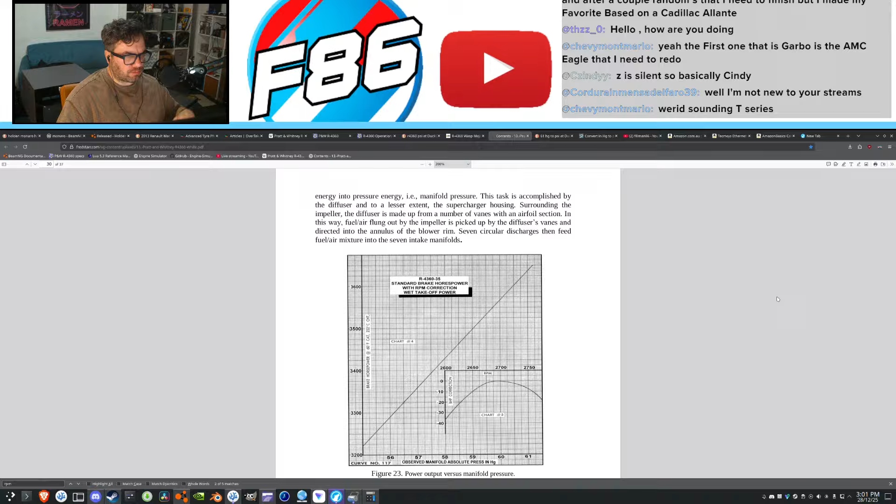Let's go without appropriate speed without overboosting. Harming without significant distortion. It's only one more. Without compromise bearing performance. Okay. Where's 302? Let's go back to 302. Oh, that is such a cool picture, because it makes it look like it's a small thing, but in reality, this thing is goddamn giant. You know what? No. Nope. Aspect. Okay. We're looking for page 305, I think it was.

Not new in my streams? Thought so. Like, it sounds like I think I came across that name earlier today, or maybe I'm just conflating.

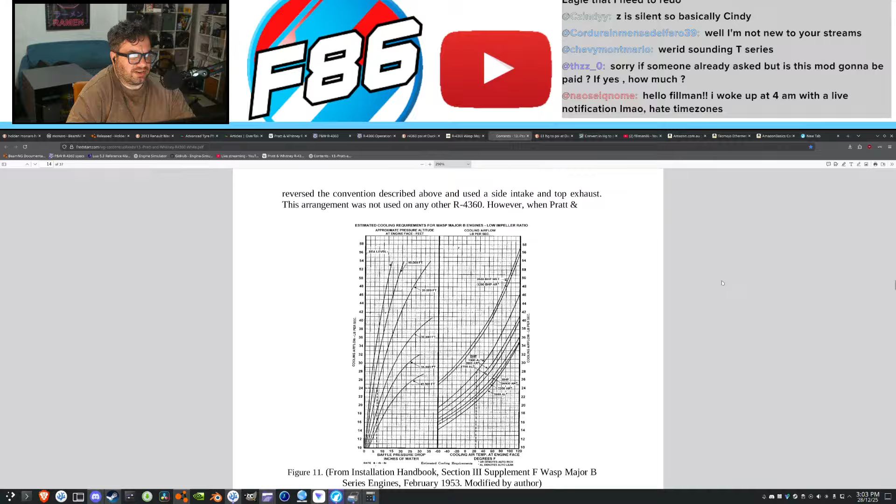Cylinder flexing. Another serious problem that plagued development was that of cylinders flexing due to valve opening forces. Holy cow! The exhaust valve rocker box was the primary culprit. Residual pressure is still present inside the cylinder, up to 100 pounds per square inch. The residual exhaust pressure bears against the closed exhaust valve.

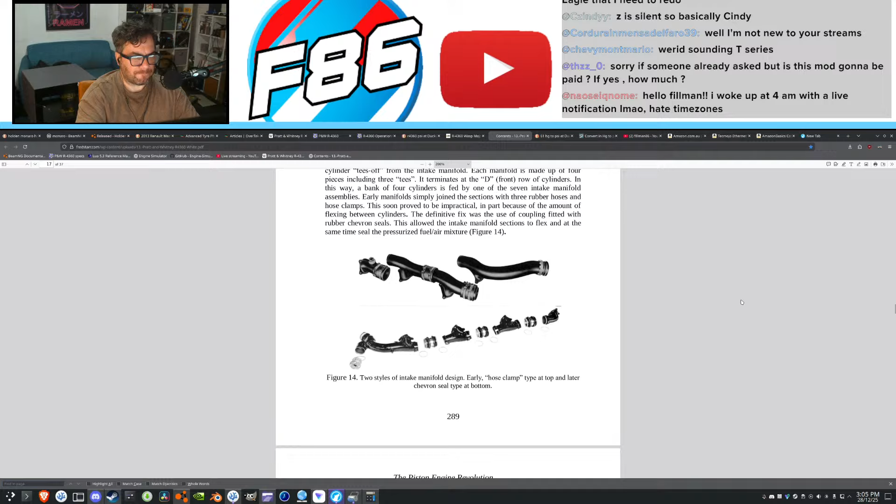Holy shit! 540 pounds. What's that in real numbers? That's 2.2 to 1. So that's... They had to push up with like 240 kilos? Holy shit, that's 2 of me! More than 2 of me, but Jesus Christ. Anyway, I was looking for 305.

Hey, when I said I thought that was a Magneto, turns out I was correct. Ignition transport, that's fine.

Hey, I woke up at 4 AM with a live notification, lmao. Hate time zones. Sorry. But yeah, I wouldn't have done that, but YouTube keeps dropping very quickly. See, the thing is when I reach the end of a stream and I hit stop streaming, YouTube will take like 10 minutes to go, are you done streaming then? But today, I leave it for 3 seconds, it's like, oh, no, you ended the stream. It's like, what?

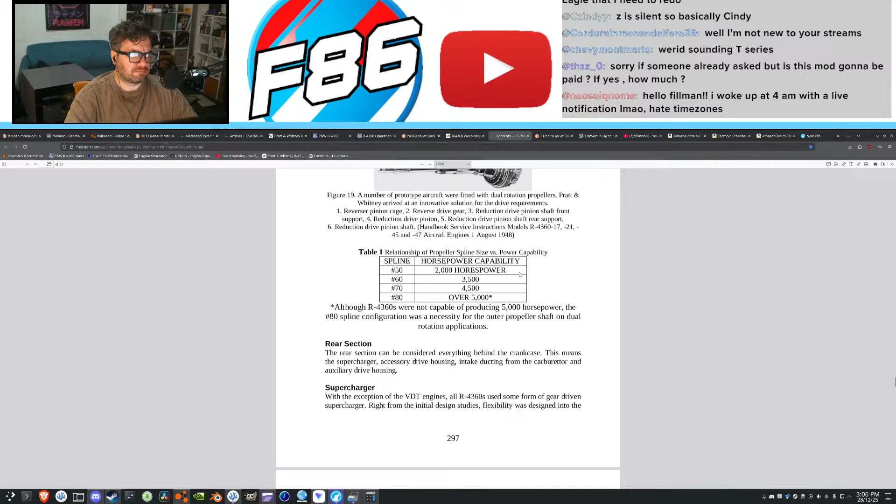Relationship of propeller spline versus power capacity. Oh, the gearing... The... what? Spline? Oh, capability. So, the more splines there are, the more power you could put through the splines. Okay, that's fine. With exception of the VDT engines, used some form of gear-driven supercharger. Right from the initial design studies, flexibility was designed into that depending on the mission.

This looks like something straight out of, like, Dragon Ball. Even Dragon Ball Z.

How much info do you need? I mean, the more the merrier. It's Sunday and a Fillman stream is good stream. Sounds good to me. That'd be like the 3rd notification you would have gotten as well.

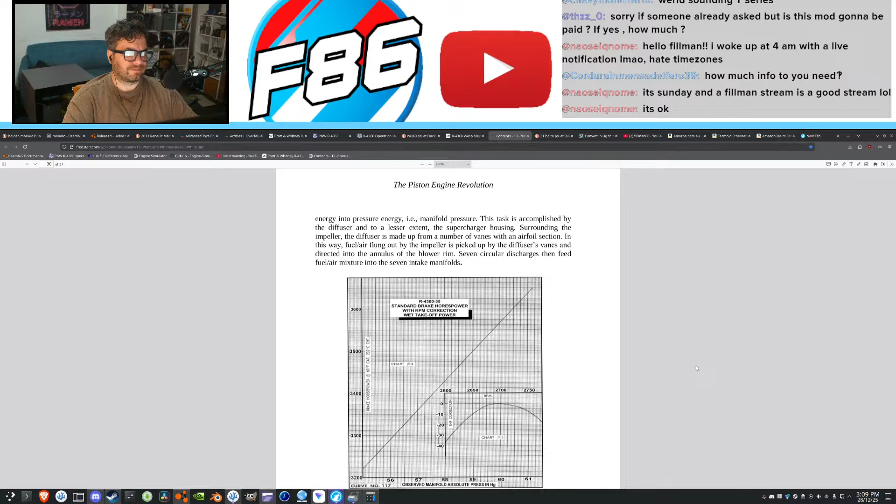It's weird. They're mixing imperial with metric. Effect of small changes in RPM from design speed. Note that these performance curves are with water injection. Oh, interesting. They already knew about using that for knock prevention. Oops. Oh! If you reduce the RPM... wait, no. Something to do with changing the RPM, that's how much you drop off. But only like 40 horsepower by 100 RPM. But I suppose that's significant. That's an efficiency thing.

Let's go to the Eagle. Sure. I love when you make F1 replicas. Yeah. I think I lost some files around the time that I was doing the successor to the Renault. What was the Renault one called? I can't remember, but the Renault Turbo F1 car. After that, it was also like their cars were getting a lot less interesting. So I struggled to build the motivation to go back to it, especially with my ADHD. Can you please make a Suzuki?

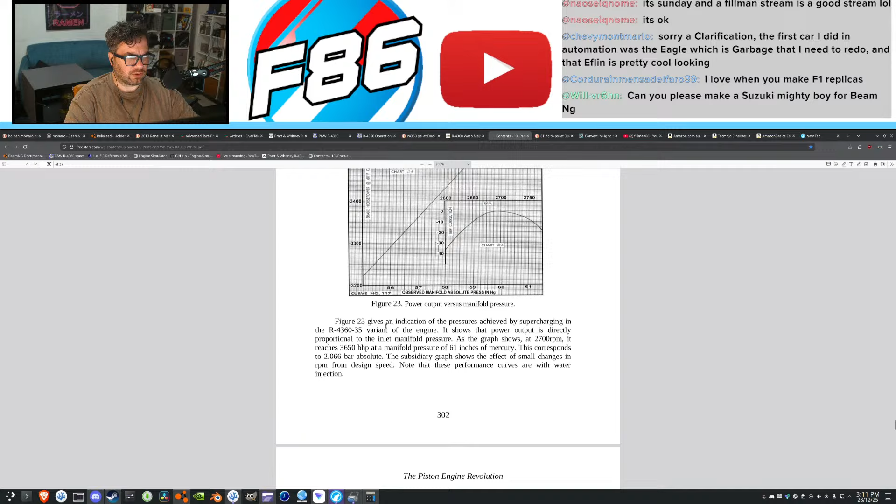No. Power control unit. In some cases speed output would not have been correct if the drive gearing... No. Piston engine revolution. Okay, so... do they call it HP or horsepower here? Oh, the searchable text, that is. They call it power. Okay, how many power? 69. It shows that power output is directly proportional to the inlet manifold. Oh, okay. I see what they're trying to say. Power everything from a single engine fighter to a multi-engine. Blah, blah, blah. Would normally power a Boeing. Okay, so they have horsepower here. Okay, there's only 8 references to horsepower.

100 horsepower per cylinder. That is a fancy way of describing it. Okay. Let's go power. Not popware. Let's have a look at Pratt and Whitney. Does it have like a base engine that it's based upon? Largest aviation piston engine to be mass produced.

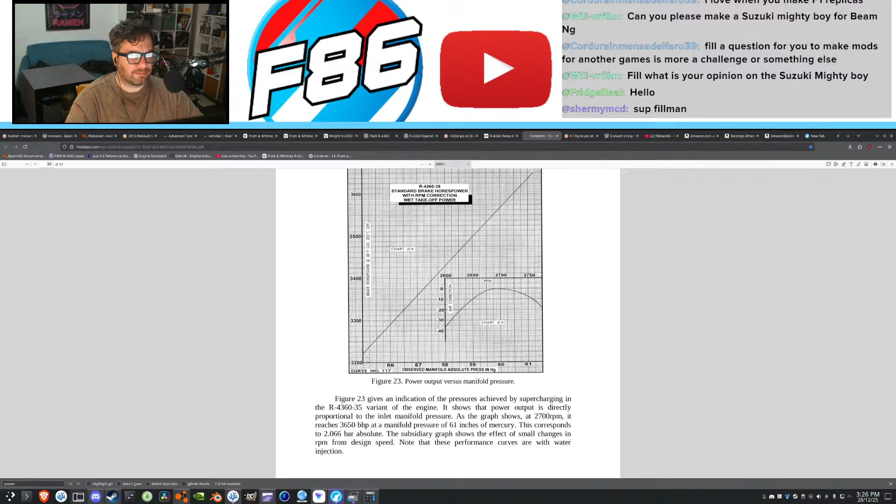Now, they said there was... Actually, you know what? I need to have a look at this graph again. Was it 305? That's not the right thing. Okay, here we go. 302. Yeah, they don't start at idle RPM. Yeah. Alright. Let's bump these up a little bit more.

Okay. That makes it look okay. Now we bring it back up with the supercharger. It'll fit in the back of an Autobello. It'd be more like bolting an Autobello to it. Like, it's just too big. How much power is this beast supposed to deliver? 3,500-ish. Okay. You have a bit of a weird graph happening here.

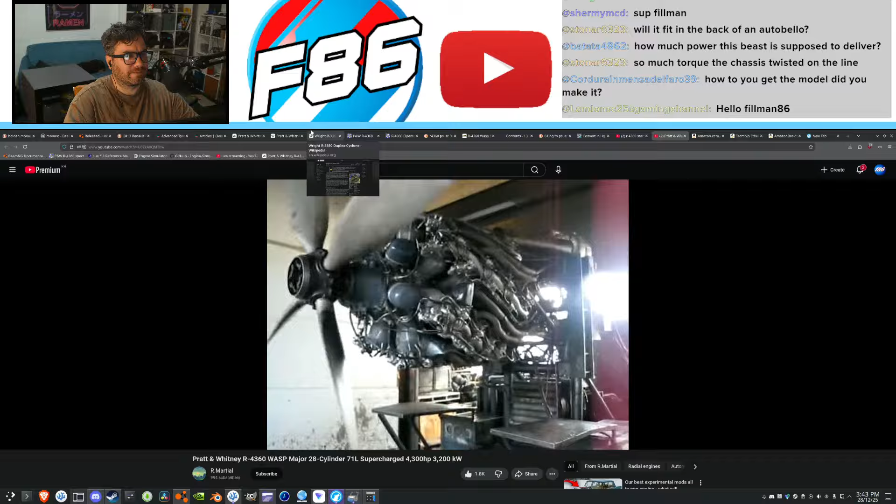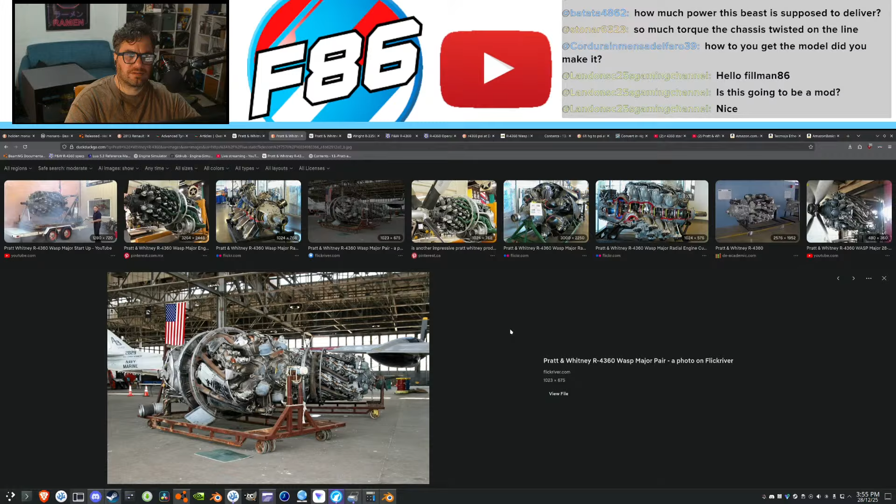So this one's got the halo around it. And then here, we got some turbos attached to it. Oh! I'm seeing that this is not just a perfect donut. It actually goes inwards, and these angle towards the outlets.

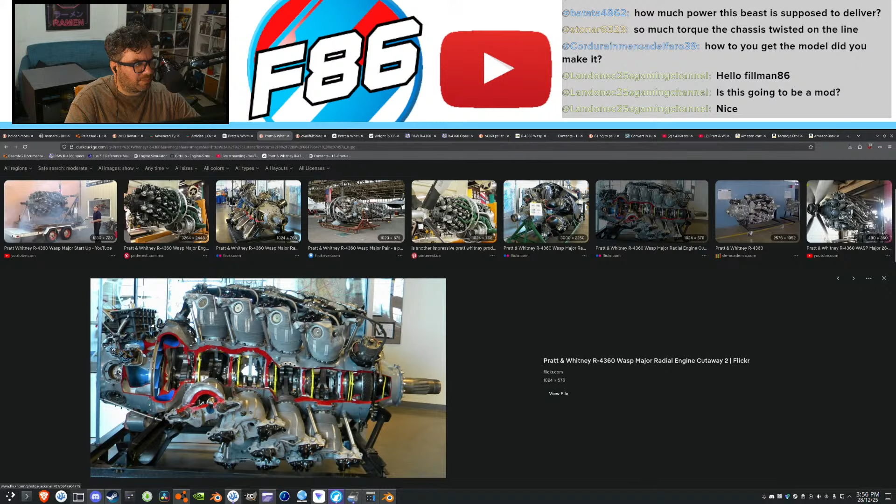Alright. What else? What's that? Oh, that's right. We're having a look at some of the weird things that are on these things. And it does get very weird. Oh, that supercharger housing inverts. So as opposed to having the compressor tube on the front side of the supercharger, it goes on the back side of the supercharger. Weird.

Wait, why does this have 2 exhaust pipes per side? Is that the... I don't think that's a turbo. I think that's something else. Oh. Wait. The cylinder sleeve is not the cooling fins as well, so... I thought they should have been separatable, and these look like aluminium. And when it's aluminium, you can't really have them as cylinder walls. Interesting.

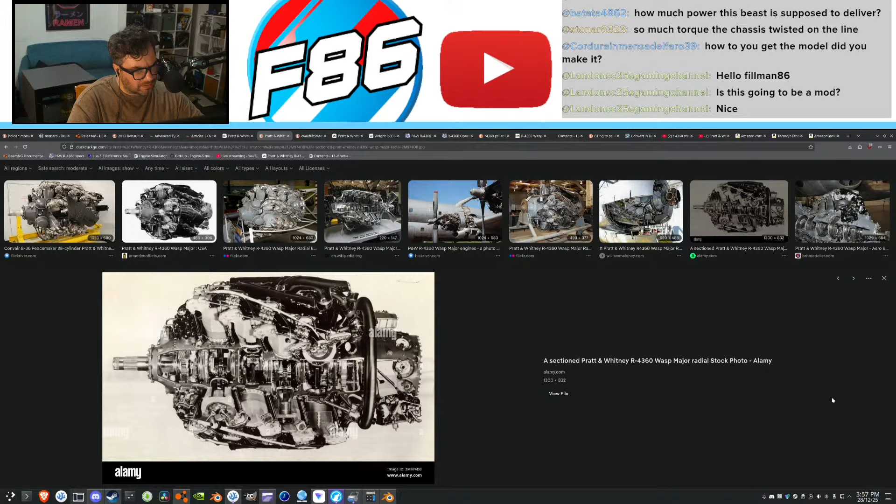I could take the cooling fins off, or add water cooling jackets. I want more pictures of the turbos. No. I don't know what that is. Wait. Have I? 1, 2, 3, 4, 5, 6. Oh, wait. No. Yep. No. I was getting confused. I was looking at that Saab that confused me. I blame it all on the Saab. Oh, we can get a better look at those exhaust pipes. Oh, these are staged exhaust pipes. Oh, interesting.

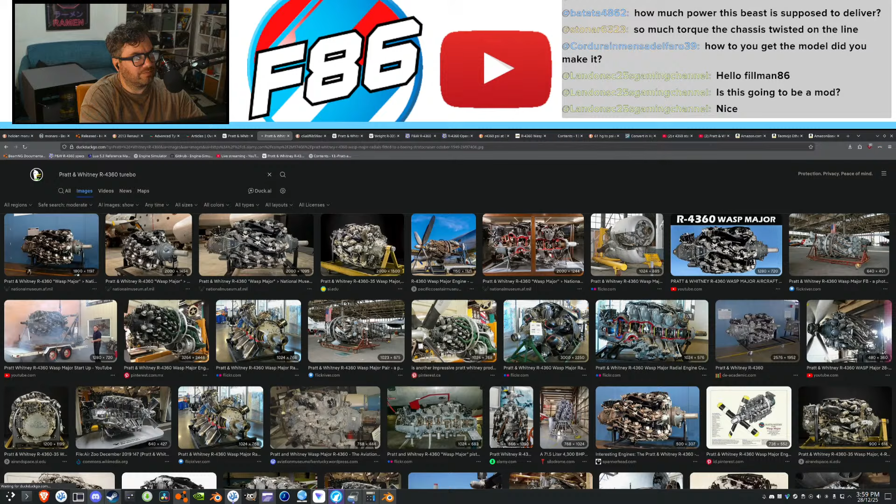Not really helping us much. Let's go Pratt & Whitney R-4360 Turbo. I'm so bad at writing. Turbo. There we go. I got some turbo. One thing I don't like about DuckDuckGo is it doesn't show related images or similar images. Like here we go. That's the one I want. Nothing else. No suggestions. Go back to that. What I want to see is the other side of the turbo at the very least, but I don't think I'm going to get that.

Oh? Oh, what is that? That looks awesome. Oh. That's pretty cool.

Give me a second. I'm just going to change my VPN location. Where should I go to? Let's go with that. Is it not gonna... Oh, good. Still forbidden. Let's grab you. VPN blockers are a real pain in the ass. Oh, good. Awesome. I wonder if it's Firefox related. Do I have Chrome? No, I don't. Let's try a different area. This one should be fine. Alright, try that again. Oh, okay, the website is just broken. Oh, awesome. Cool.

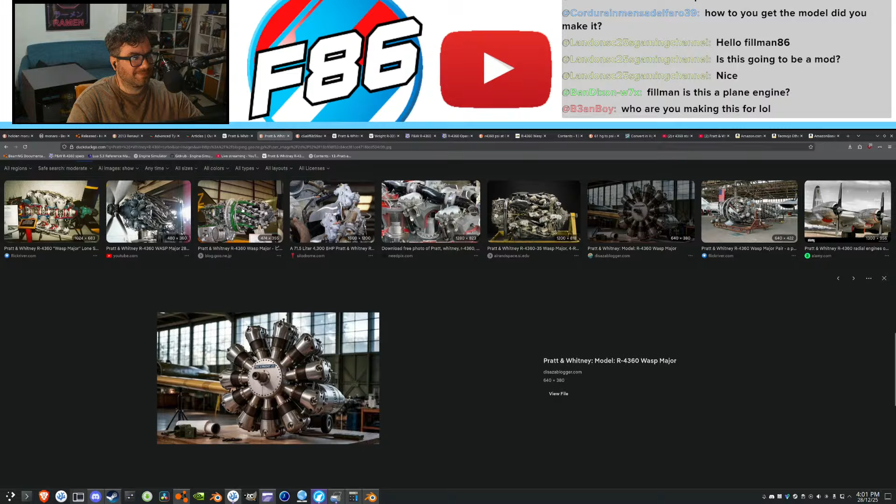Is this plane engine? Yeah, it is. The biggest one ever. That doesn't help me. It doesn't help me either. Oh, wait. Here we go. We get to see the cylinder wall lining. Oh, okay. Now I see the cylinder and the lining. Oh, okay, yeah. Hey? No. What is this pipe here? Some sort of cooling, maybe? Air intake. Okay, yes, of course.

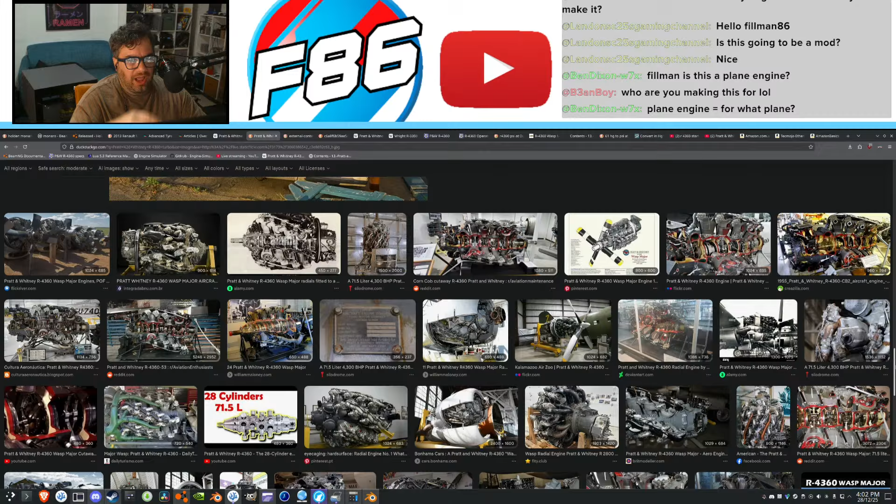This is a weird bit of music. I think we're SOL. Oh, okay, there's more. Oh, wait, no, you know what? I forgot. There's one more thing. When all else fails, give up on DuckDuckGo, because DuckDuckGo is not actually that good. There we go. Alright, what are we looking for? Same picture. Unfortunately, nobody's taken a picture from a different angle of it. That's a really cool picture. I'm gonna have a look at that one closer. Oh, it's aliasing. I was wondering why that looked so weird.

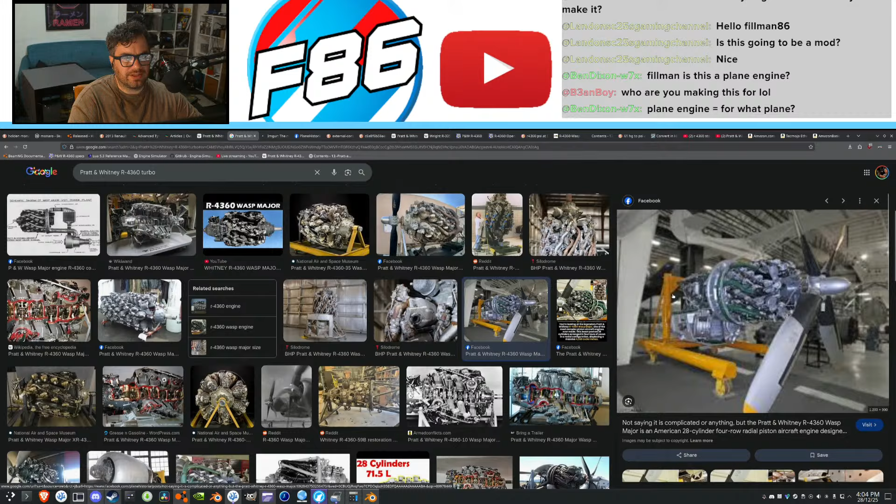It's on Facebook? Alright. Why would I care? Just send me the thing. What the fuck? Oh. That's probably to do with the browser I'm on warning me about redirects. What are we doing here? This isn't what I was clicking on, was it? This looks like a Google issue, not a Facebook issue. So Google is like, hey, do you want to go to this thing? Oh, by the way, we're redirecting you now. It's like, no shit, Sherlock.

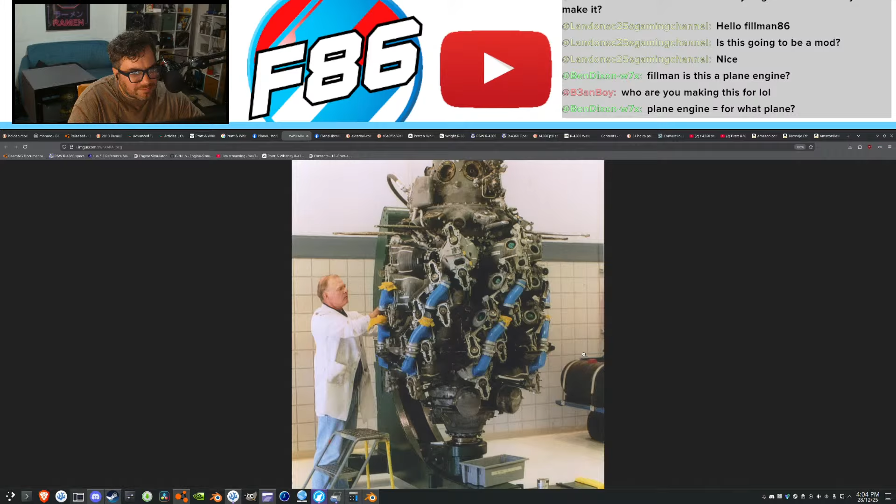That's not making the image any better. I wonder what those are. Oh, wait, no. Scroll down. Don't be a penis, don't be a penis. Okay, yeah, no, good. I think it's in the comments, maybe. Is that going to be the small image, or are we going to get a bigger image now? You're a son of a...

I was wondering if anybody had put it inside of a vehicle in real life. It's that one goddamn turbocharger image. Great. Thanks. Good. I can't tell if it's 1 or 2 turbos. It's so hard to tell. They're all the same image. There are 2 pictures of the turbochargers on this thing. That's it. Nobody has ever, in the history of humanity, ever taken another picture, apparently. God damn it.

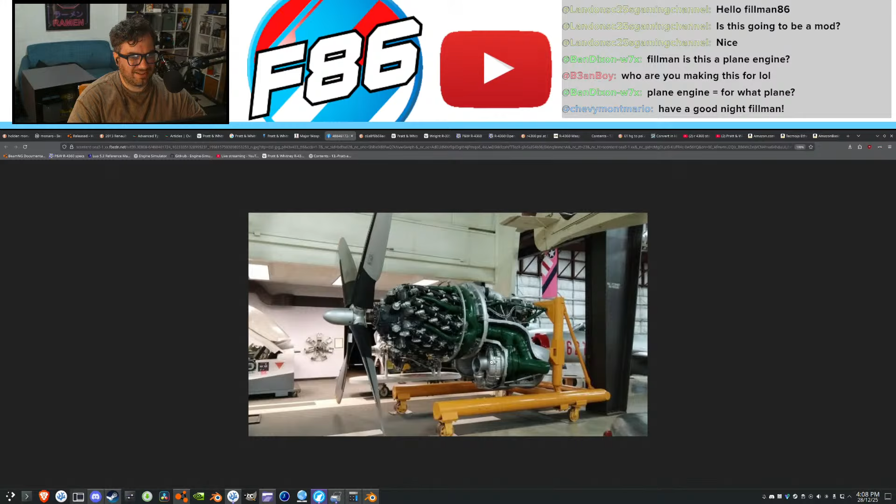Now, because it's a radial engine, am I looking at the other side of the engine, or is it flipped upside down? Like, yeah, rotated around. Damn it. I think... therefore I am. I don't know. I think it's twin turbo. You know what? Bad request. No, your bad request. What do we got? Thanks. God damn it. Alright, let's take off the turbo, because it's getting confused with turboprop engines.

Now, I remember something like... Can you please click on the image? Oh, what is happening? Do we have... Okay. You know what? I'm gonna look more on YouTube. R4360 Turbo. That is just the naturally aspirated version. Come on, start playing. Yep, no, that is not the turbo supercharged version. Thank you very much.

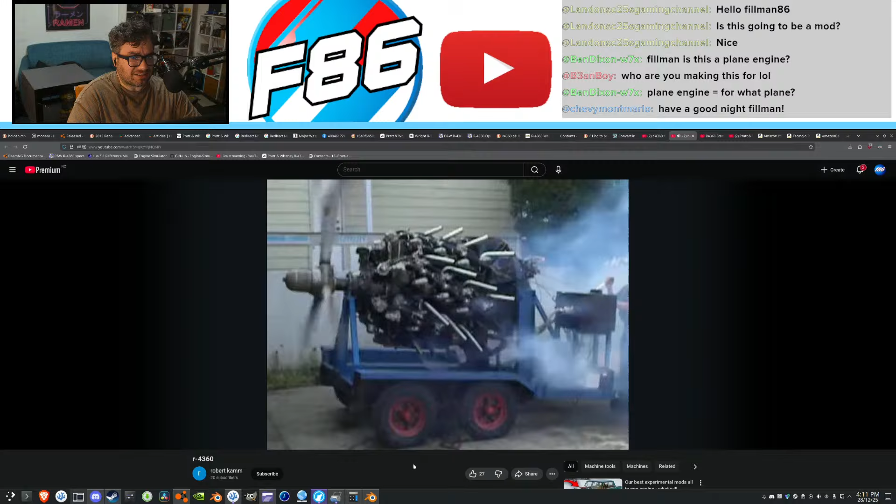It looks like people are using the turbocharge ring to get naturally aspirated. I don't know why. Is it a convenience thing? Oh, that's funny. Hold on. Wait, is this the one? Yeah. I think this is just like somebody doing it out in their shed. They've just stuck some normal exhaust pipe to it. Oh, that's a bad place to stand. How are you not deaf already? Is it running or is the starter still running? I can't actually tell. I think it's kind of firing. What a person. Yeah, so that's just the donut exhaust.

Okay, what do you got here, Mr. Short Person? Shorts Person, sorry. Hey guys, it's Ewan with the Air Zoo. Okay, so... Oh, wait, hold on. Oh! That was a different one. This person's ripped a video probably from somebody else, because that's just what shorts people do.

Aha! I don't know what sort of ducting that is, but that is not another turbocharger on that side. So it's got a single turbo? Okay. Interesting. Wish I could zoom in even more. I hate shorts so much. Okay, so a little bit closer is not really helping us. Okay. There. Maybe that's ducting for an intercooler.

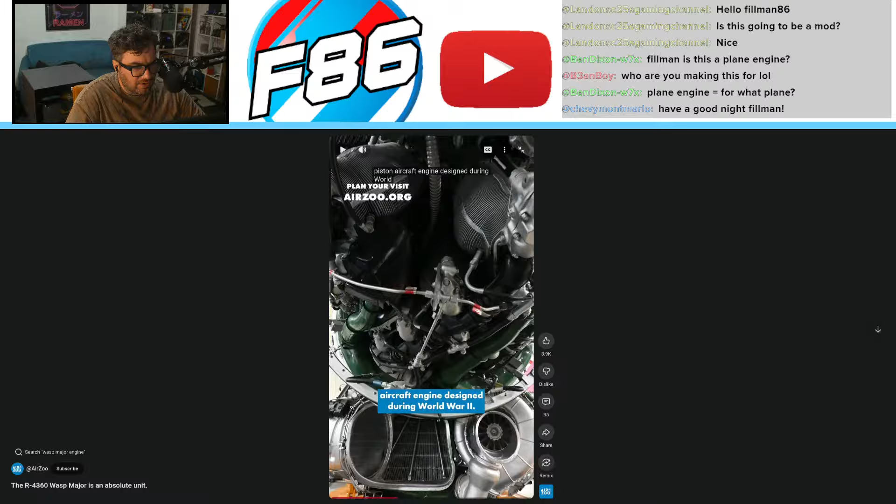Do I want to make my own turbo? I don't really want to, do I? Oops, that was the wrong thing to do. Good. Okay, now it's broken. Let's have a look at those images we were looking at before. Okay. How does this go? I think it goes around here, and then through an intercooler, and then back up into the intakes. So, how do the intakes go? That's right, intakes are at the front because we're reverse mounting this. We might flip the turbo around, since people seem to modify the turbos anyway.

We're also going to do some rearranging. I'm going to get rid of this. Kind of. We're now going to go into exhaust. And... What? What is this? Oh, the triangles for the exhaust. No, we're going to go new file. R4360 Turbo.jbeam. And then we'll put it in here. We might do a few different variants. No, that's not going to reformat it for us. Epic music. Turbocharger. R4360 exhaust. We got the donut on here. Then we might model something up, I think.

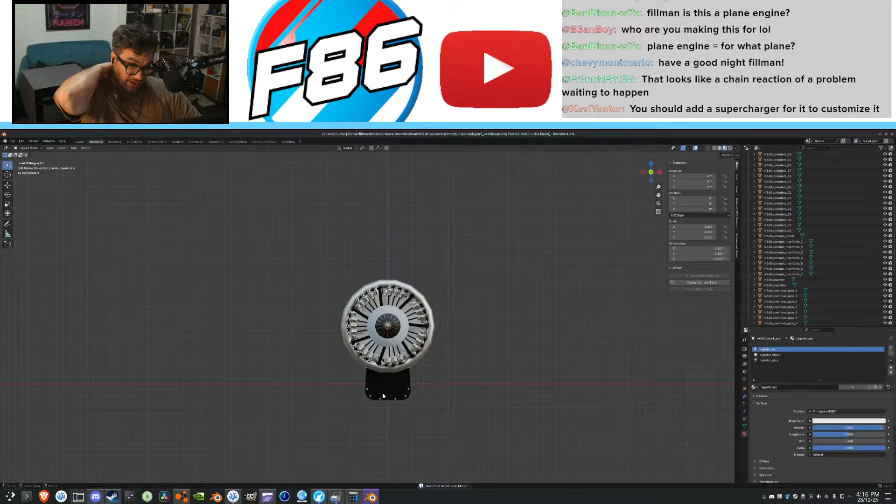Ah, right. Okay. Let's make a variant of this. V3 turbo. Then... Oh, yeah, this is back to front now, isn't it? So the turbo intake pipe is going to have to run all the way to the front. Which, hold on, gives us this. That's the cap for the turbo boosting. Okay. I remember seeing that and not knowing what it was. Turbocharger. Let's grab that image. Oh, no. There we go.

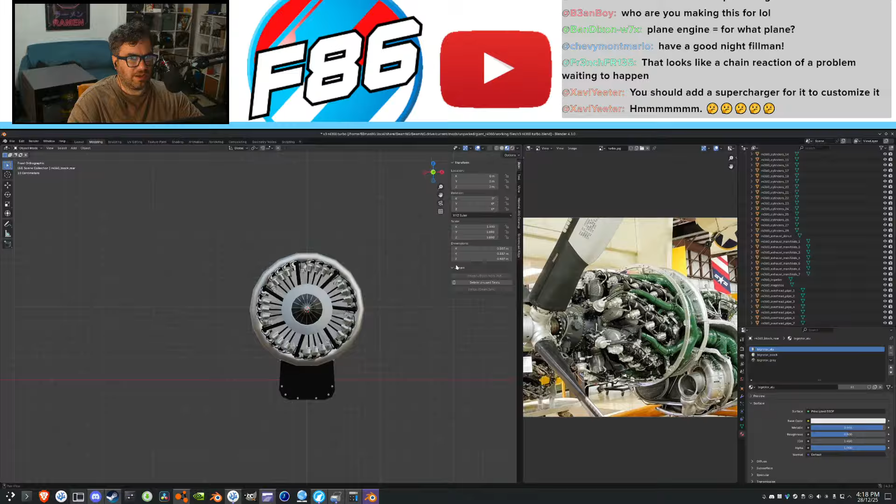Unpacked BeamNG working files. Turbo. Then... how do I do this again? Oh, wait, it's up here. There we go. Image. Open. Turbo. Now, cylinder. 1, 2, 3, 4, 5, 6, 2, 6, 12. Let's go. What does 12 look like?

Let's try 24. Triangles, 92. I think this should be fine.

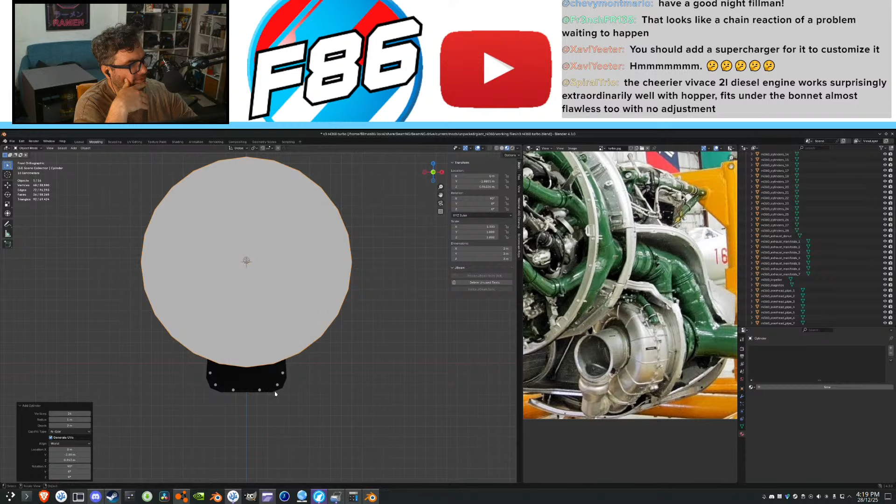What is going on? Making the turbo for this giant thing. Kind of looks like it's about yay size. And it would normally go behind the engine. We don't really have the room, do we? Because the whole truck thing is in the way. Oh, and there's a steering arm. Oh, it turned around anyway. I think it's okay to have it on this side.

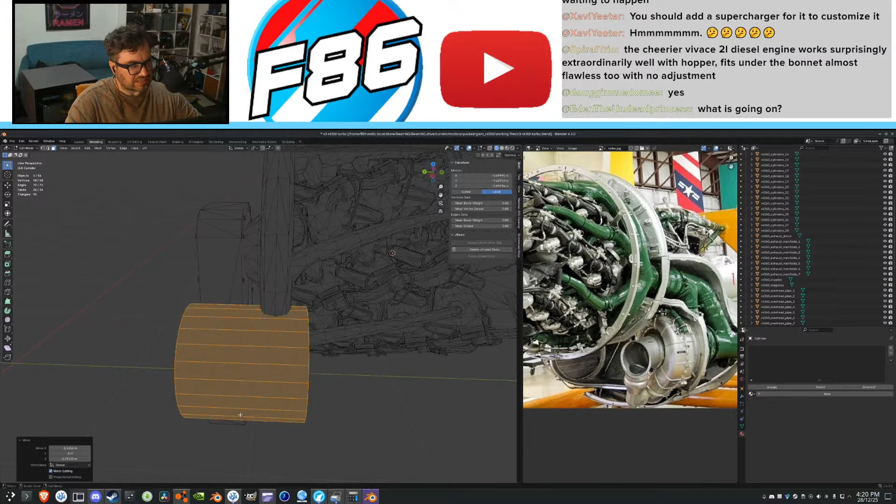Now, that is a weird housing. I wish I had better pictures. Something like that. Where would this chassis rail come up to? Chassis rail basically touches that exhaust tip, so it's going to have to be quite high and out like that. Okay, now, how does it connect? Pipe comes backwards off of this, so let's go curve, Bezier.

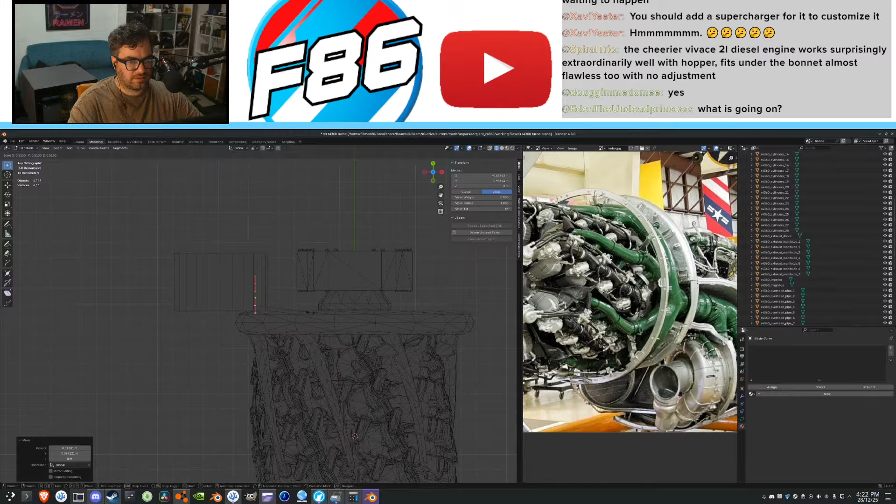Weird. 45, 0.7, 90. Nope. What just happened? 90. Now, this does some weird stuff. We're definitely not going back as far as they did. We're going to have to separate now the intake from the exhaust housing. Yeah, let's do that. This is a tricky one, because it conically goes down.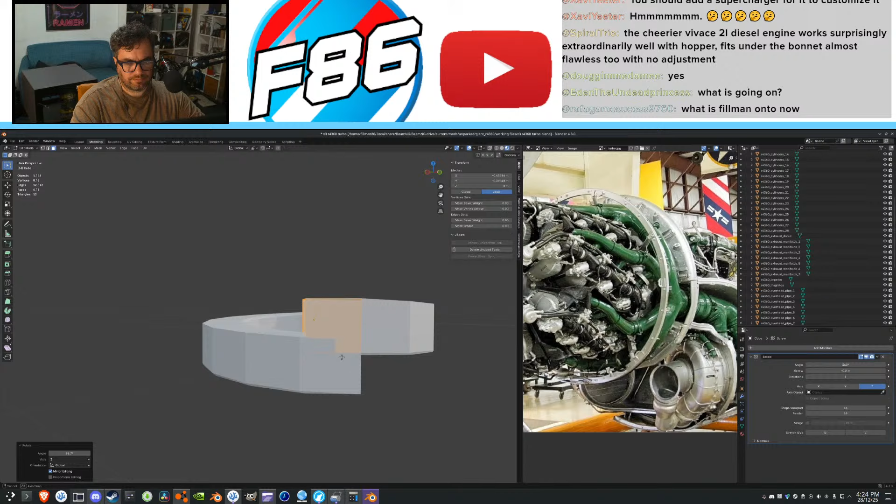I really should use screw, shouldn't I? Let's try screw quickly. Now. Something like that. How do I... There we go, something akin to this. Can I change the inwards amount? It doesn't look like I can. I just have to modify then. What am I on to now? Doing the turbo.

Right, turbo mullered this thing. Something like there. Like that. And that doesn't help. No, we're not going to do the inner part yet. Okay. New collection. Turbo modeling. Oops, modeling apparently.

What is happening with this screw here? Oh wait, that's right. It doesn't need to be three-dimensional. Yes, of course. Yeah, that works. There. The top can be fairly flat. Save on those polygons at least a little bit. Okay. Convert to mesh now. Oh dear.

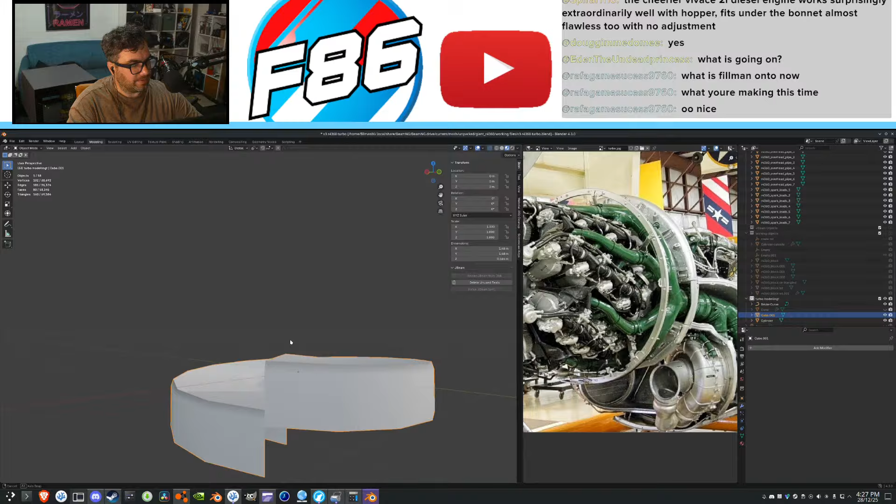I want this to face the middle. There we go. All right. Big turbo, bro. Is it doing auto shade? Let's go shade smooth. Weird. Why has it got such a sharp edge? Mesh. Normal. Recalculate outside. Hey, there we go. Okay, it was just inverted. Then we will do some rearranging of some things. Wait, where are we? There. Okay, that's looking fairly good. Then we're going to want to fan these out a little bit.

No! Oh. I thought my stream had crashed out again, but no, it just wants me to verify that I am who I say I am. Giving me a heart attack at every corner of the stream. And then it takes forever to load. Thanks. Thank you. Alright.

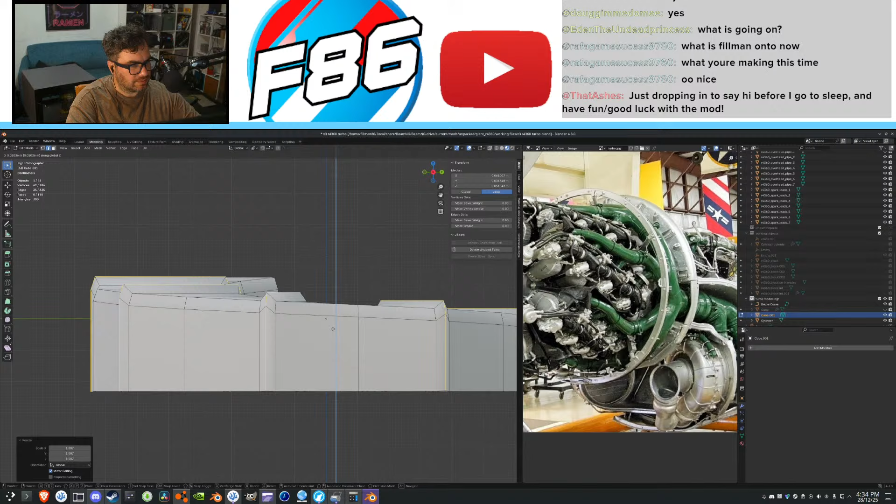We only need that many. Okay, these should splay out like the ribs on here. That looks fine. Then add in all that poly count that I was looking to avoid.

Okay. There's only 440 triangles in this. It's not so bad. We might make all of these just a little bit smaller as well, because they're looking very pointy at the moment. Okay.

Now, because we don't need the poly count to be ginormous on the inside part here, we're just going to overlap some meshes instead. So let's create a cylinder, mesh, cylinder, oh fuck.

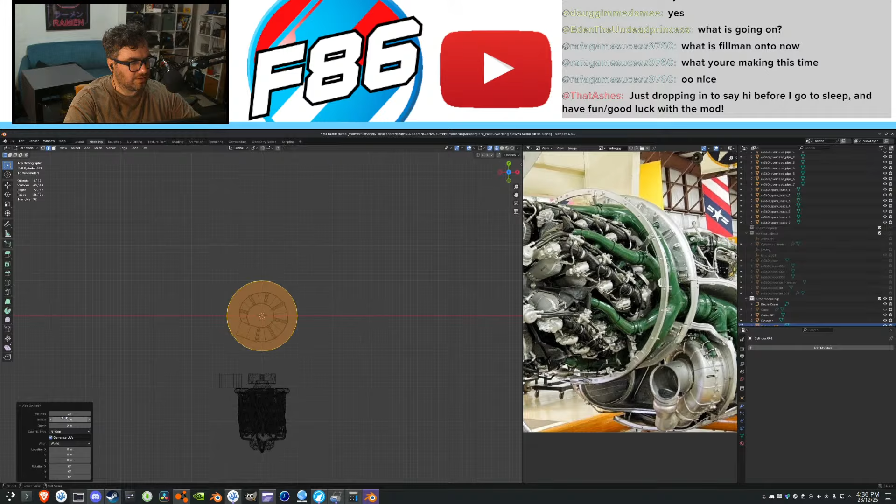That is the intake. Oh. I left it too high res, didn't I? You know what? Let's go here. There. Cylinder. 24, it doesn't need to be that high. Let's go 12. 6? No, we'll go 12. That's too low. Something like that. Well, that's what we like to see.

Then... there we go. Delete faces. Accidentally made it its own object. There we go. Then extrude, scale. Good. Lowish poly count. We can drop that even more.

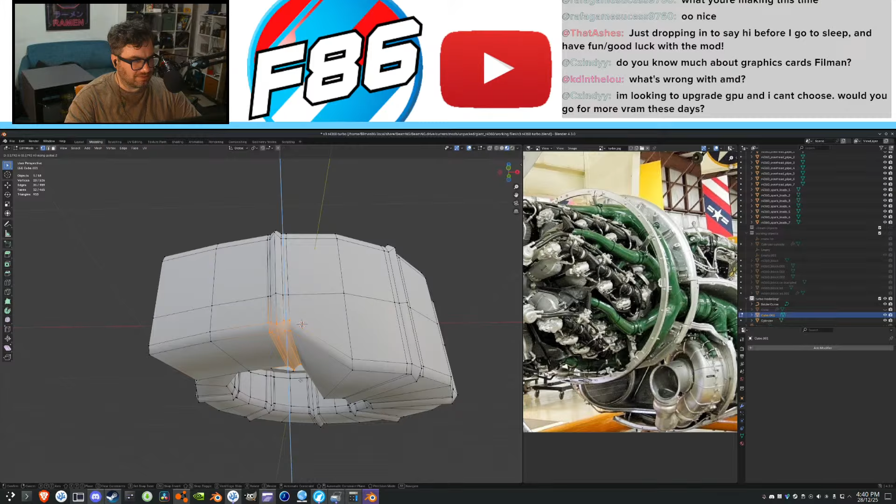Oh yeah, the other thing that I don't like about AMD is the fact that I got like a top-of-the-line AMD card being marketed really, really well, and the drivers were just dog shit. And after having it for months and just having the worst experience and like zero stability, I traded it, and then like half a month later, they finally fixed it. I was so pissed. But I still got the 3080, and it's been one of the most stable cards I've ever had.

Even on Linux. My problem with Linux is Linux. "AMD has way better drivers now than they did." Yeah, but they're still just not very good.

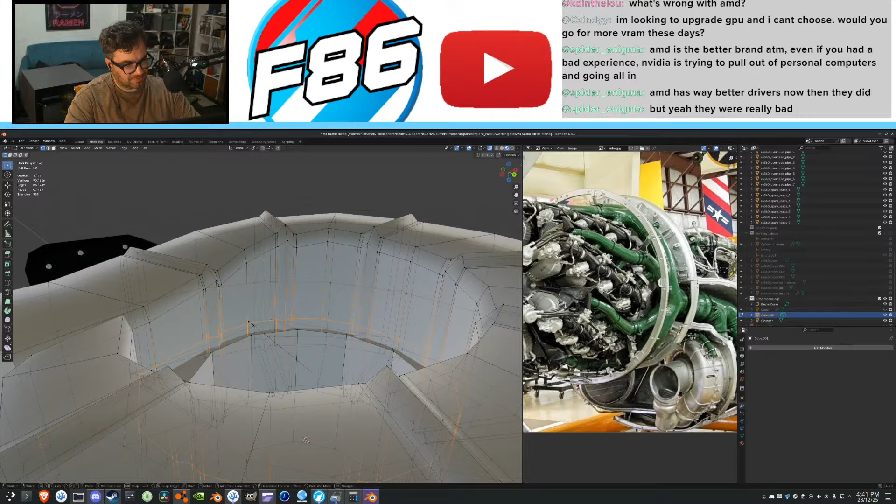Okay, that's all we need. So all it needs to do is cover this hole up.

This sounds like it's meant to be an anthem for a 90s TV show like... What's that one with the twins? Full House, I think it was? Yeah, that's kind of what this song is giving me vibes of.

Shade smooth. In. Through down. And then we'll put an impeller housing in there and make it spin. Okay. That is our snail.

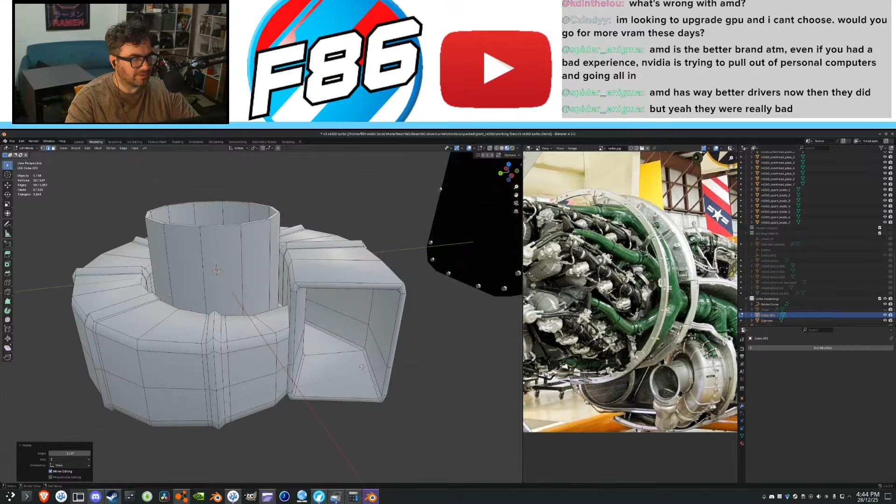There. That's actually not that bad. And I don't have to add an extra face in there. Oh, whoops. Okay. Where are we? There we are. I think that's okay. Let's sharpen those up. I think we have ourselves a turbo.

"I'm looking to upgrade, can't choose. Would you go for more VRAM these days?" It really depends what you're trying to do, and it's coming down to every individual thing. "AMD is the better brand at the moment, even if you had bad experiences. NVIDIA is trying to pull out of personal computers and going all in." Yeah, no, I get that.

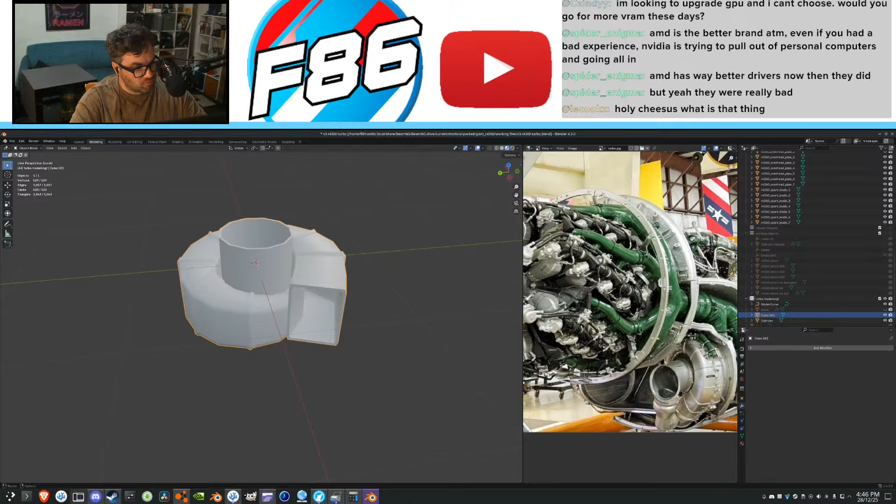However, software and firmware support for NVIDIA is still so much better than AMD. Don't get me wrong, AMD is a lot better than what they used to be, but they still suck at it, and they keep wanting to drop support for like 2-year-old cards, where NVIDIA's doing like 10 years, generally. Like, they only just stopped supporting the 1080, which is... GTX 1080 release date.

Why is my internet so slow? I'm gonna change my VPN location. I think my VPN's broken. Anyway. Released 2016, which is nearly 10 years old. AMD tried to do it for a 2-year-old graphics card. So forgive me if I don't like AMD that much as a company. "Has way better drivers now than they did," but yeah, they were really bad.

This is the R-4360 Pratt & Whitney Wasp Major. It's not a mouthful, you're a mouthful. Okay, so this is the intake. We have no idea what the exhaust looks like. I might...

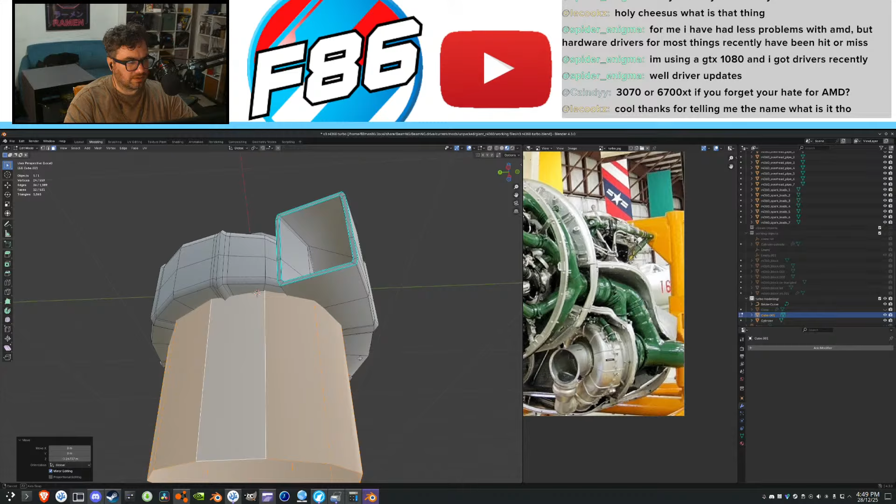Actually, yeah, we don't need this square plate in here. Because by what I'm seeing, it kind of goes like this. Then we might make our stuff a little bit easier so it won't collide, and then we can lift up some faces if we need to. Go like that. Then I think we can delete these vertices. Before we do that... Then we do that. Okay. Oh. Okay, well... Oh, okay.

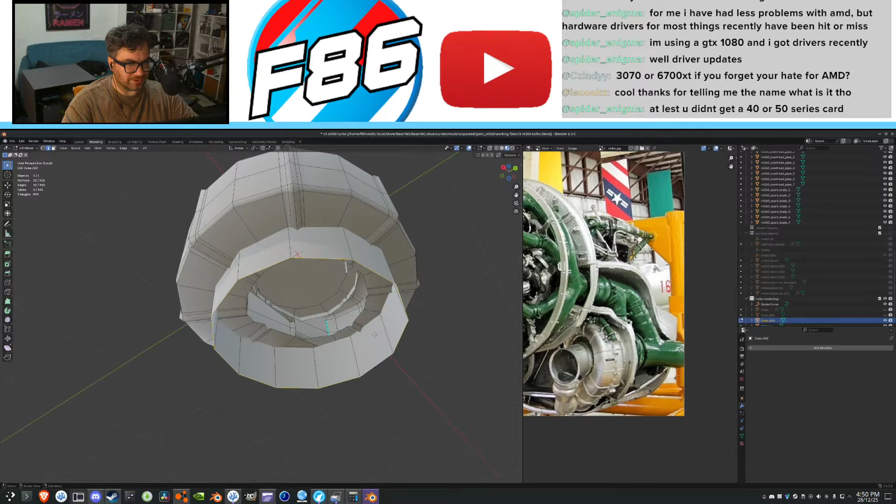There we go. It's gone right. Then it's got some sort of heat shielding, which we're not going to bother with. But from here, we're going to create the exhaust housing. I do not know what that exhaust housing looks like. Damn it.

Yeah. I really wish that Intel was better. If you don't mind tinkering and dealing with it and you want a bargain, then the Intel cards is where it's at. But you have to be okay with tinkering and learning things. It's also not great on Linux.

Oh, this ring is for the intake. Oh. I think I must have gotten confused at some point. Show me what you got. What is that? Oh, that's a different engine. This would have been good if they'd taken off the other side, or at least taken a picture of the other side. Nobody thought to ever take a picture of the turbo from the backside. Probably doesn't look like much, so nobody ever took a picture of it. Oh, it's getting so close there.

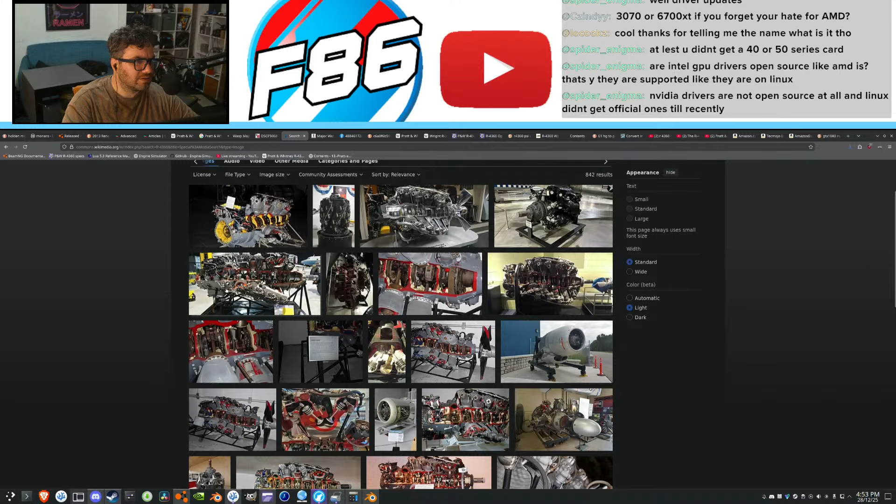Okay, we're now getting more pictures of the engine by going to Wiki Commons. Oh, interesting. You know, I should have a look at that. And that.

Broken? What happened? Okay, that doesn't work. No, not speed test, packet loss test. What is happening? Okay, well that's not great. 5% packet loss.

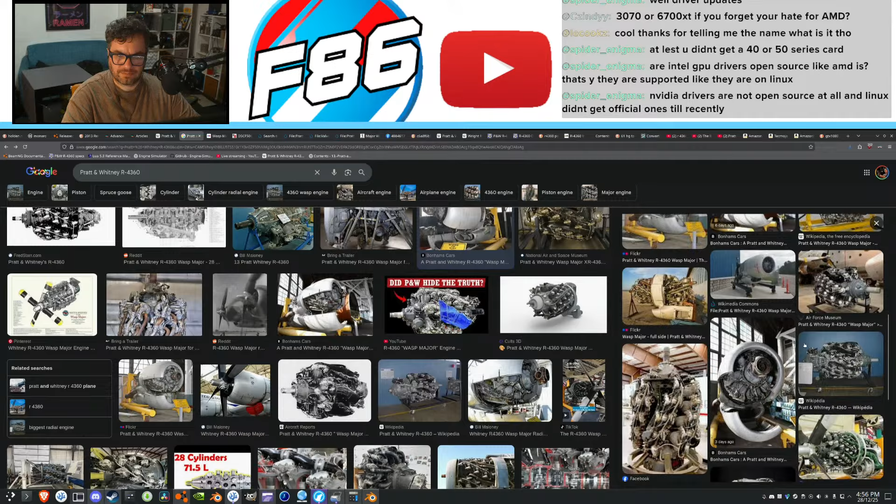What is this? Is that how it gets that, like, fanned out look behind the... How do you explain it? Is there a picture of it here? I saw it on one of them. I don't see it. Oh, wait, no, you know what? I think it was on the Wiki Commons thing. Here we go. I think that fan out is meant to be for this. Anyway. Oh, that's a big picture. If only it was what I wanted.

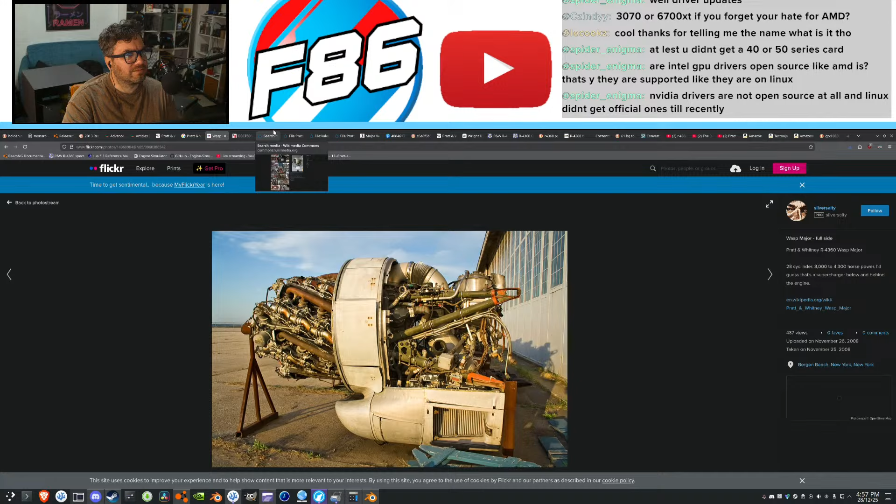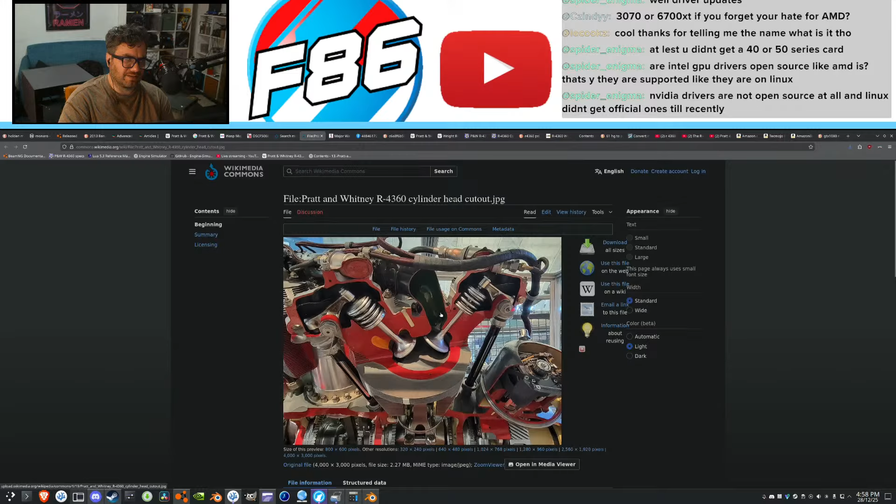Is that meant to be the exhaust there? Is that where it exhausts from? Hmm. Anyway, that doesn't help us, but what I wanted to have a look at was the intake pipe a little bit. Ah, okay. Yeah, that makes sense. And same thing here. Yeah, that makes sense. Good, alright. And apparently I wanted to do it a third time, okay. That's peculiar, yeah. Usually it kind of like wraps around the valve. Huh.

Anyway, do we have more turbos? That's a pretty cool looking teardown picture. Oh, interesting. Oh, very interesting. I think that's the... No, that's the front of the engine. Oh, it starts big and then gets smaller as it goes to the end of the exhaust. Interesting. Why do I keep saying interesting? Jesus Christ. Huh. Look at that pitted piston. Damn, son. That's some real damage. That's a lot of damage. Flex Tape ain't gonna fix that one, buddy.

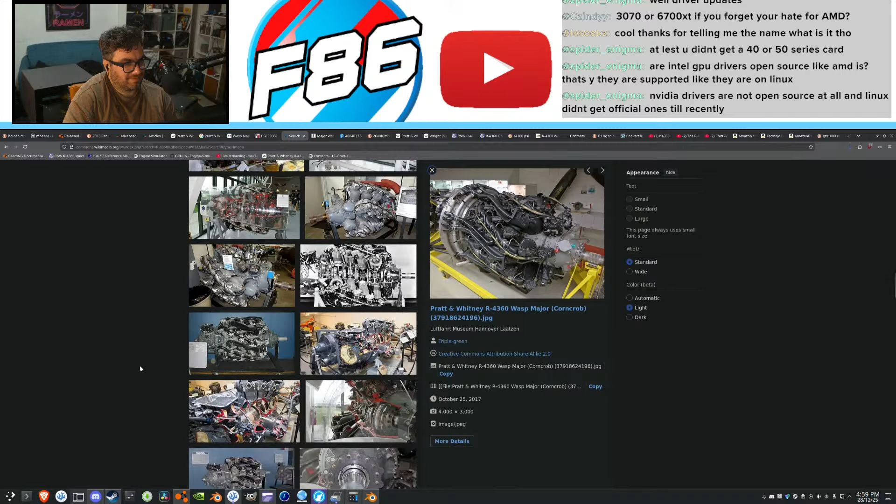There's a lot of Pratt and Whitney on here, apparently. How is this so much? But the Pratt and Whitney page itself has like 10 images of exactly the same thing. Can somebody also take like the backside picture of this to see like how the exhaust fans into the housing? That'd be great. Okay. Alright. That's a sheath. I think heat shielding sort of stuff. Or, no, that's not the way the exhaust intake went. That's a cool picture. Not one I want, though.

Now we're getting into some very unrelated things. Is that James May? No, that wasn't James May. That was an old lady. Whoops. Sorry, James. No, alright. That's, I think, all she wrote for that.

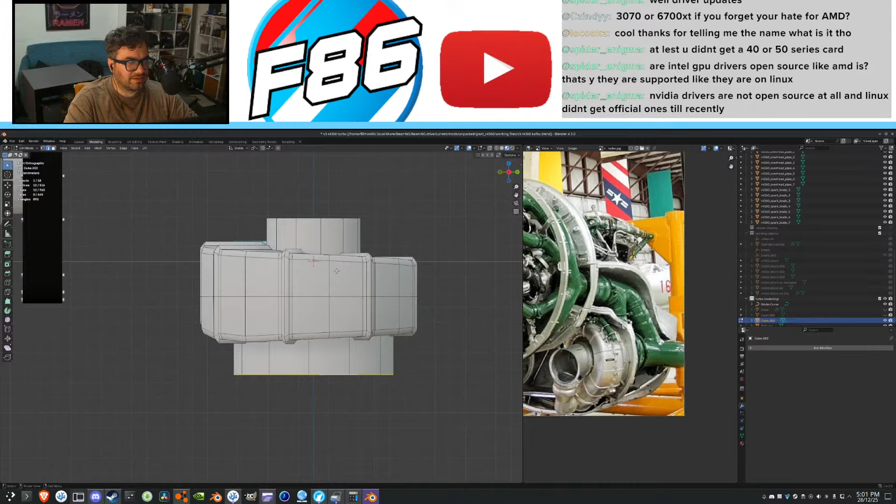Oh, no, that's fine. We do get a little bit of the backside of it here. That goes straight into an intercooler. Looks like there's a bypass for the turbo, so it'll suck around it if the turbo is not moving fast enough. And then... I have no idea. A similar thing. There, I think we'll do that.

So we're selecting these, so we can easily dissolve them. Alright, we're back to a simpler model. I'm guessing because this is cast iron, it doesn't need to be reinforced like aluminium would. Or if you're American, I suppose you say, aluminum. Alright, that looks fine.

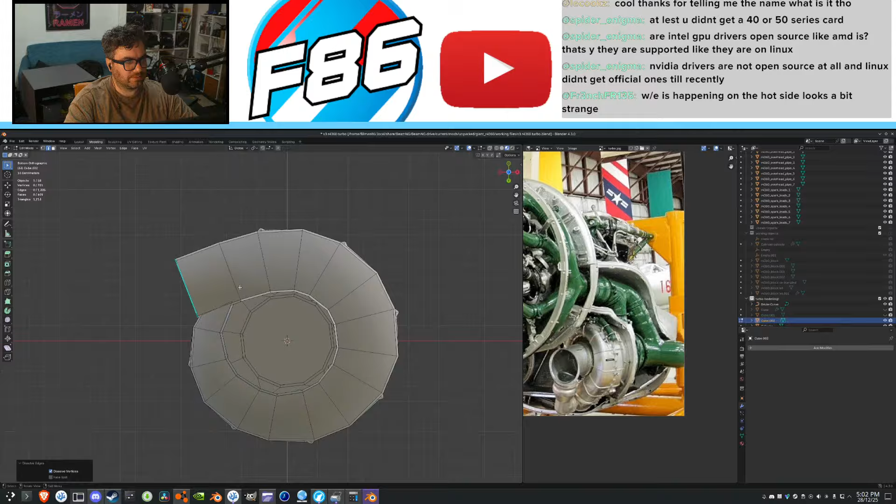But it needs to be rotating the other direction? If this needs to rotate this way, that means we're going clockwise. And then this needs to go anti-clockwise. That's the correct way around then, isn't it?

That doesn't seem right. Something seems wrong. What is... I need to have a look at a turbo picture. My brain is failing me on turbos at the moment. Turbo. They go the same direction, don't they? No, they do go opposite directions. Okay.

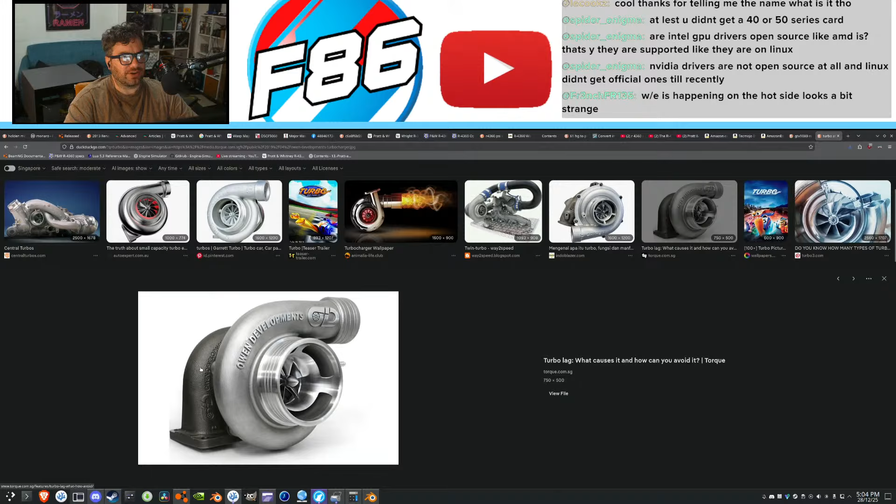Is that an AI picture? No. Just a very weird picture. So if that spins that way, it goes out that way. If that's going that way... Oh! Yeah, no, exhaust goes in that direction. Yes, I'm an idiot. Okay. That's why I was failing. X180.

It did it again. Has it just updated chat? I think my chat keeps fucking up. At least you didn't get a 40 or 50 series card with all of the melting things. Yeah, no. NVIDIA is not good. It's just, we're kind of stuck in a bit of a shit sandwich at the moment, really.

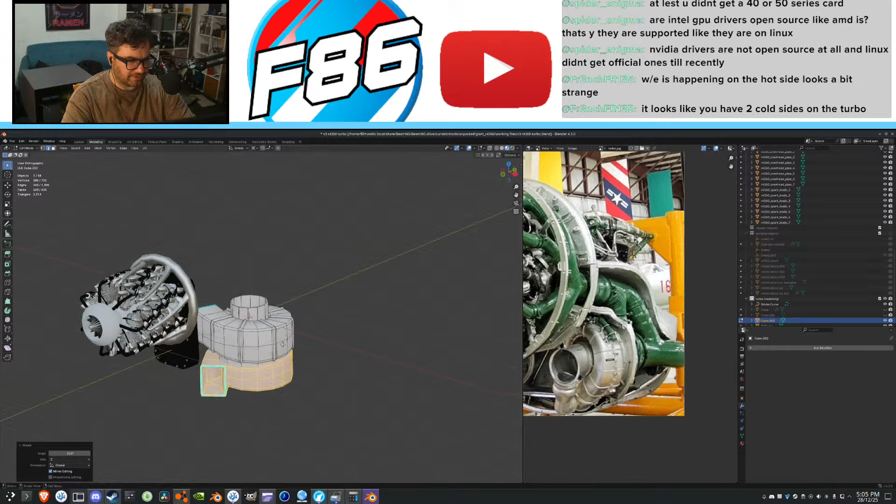Sure. We can rotate these housings if we ever need to. For now, I'm going to create... good. A rotational point to make it easier to rotate. Right. Should be good. Then next is probably materials, right? Kind of want to also make these more circular on this side.

So, how do we do this? Think, grab you, grab you. Go individual origins. Nope. There we go. And median point. Okay. It's a little more circular.

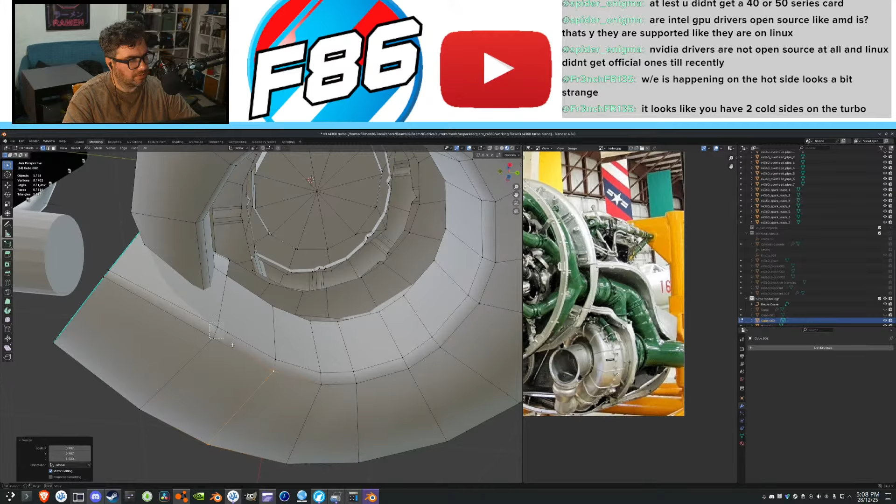Then finally, the exhaust. Should be basically done. Oh, we're gonna have to watch out for the mesh colliding there, huh? I think I can do that. That. Then you and you. Oh. Not perfect. Oh well. We'll get there. Let's go like that then. And that's made it a little bit better.

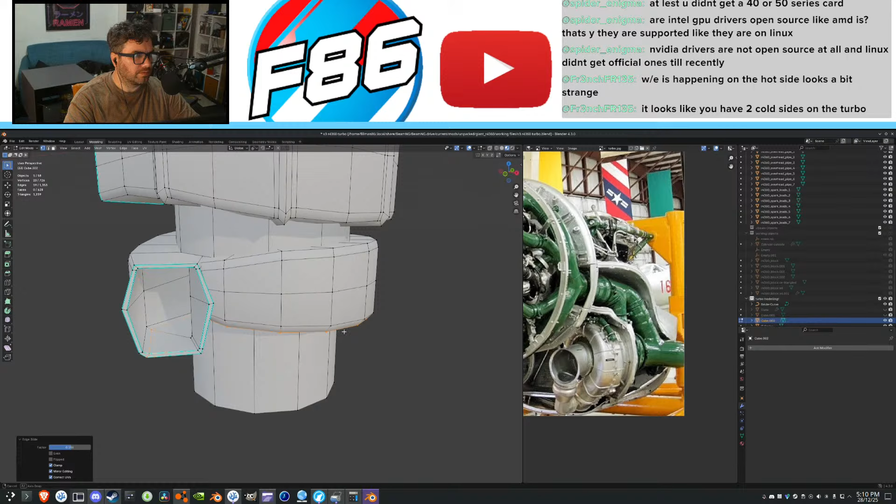Nah, that's not good. That's a little bit better. Yep, that's good.

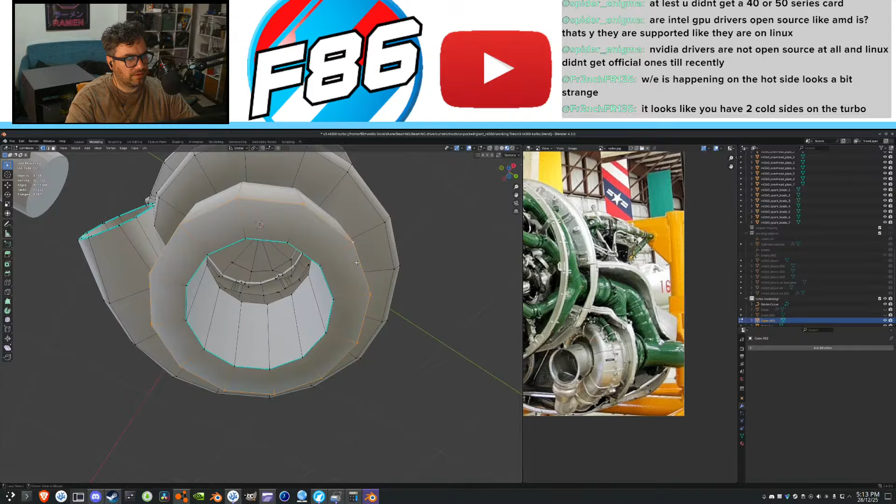That's the wrong thing. Center. And then we'll fill that in with an impeller. I can't even think of what the term is for that side of the turbo. You know what, actually, we might just shrink you. There. Cool. I'm not going to bother with doing that angle there. I'm just going to now paint this in 2 paints.

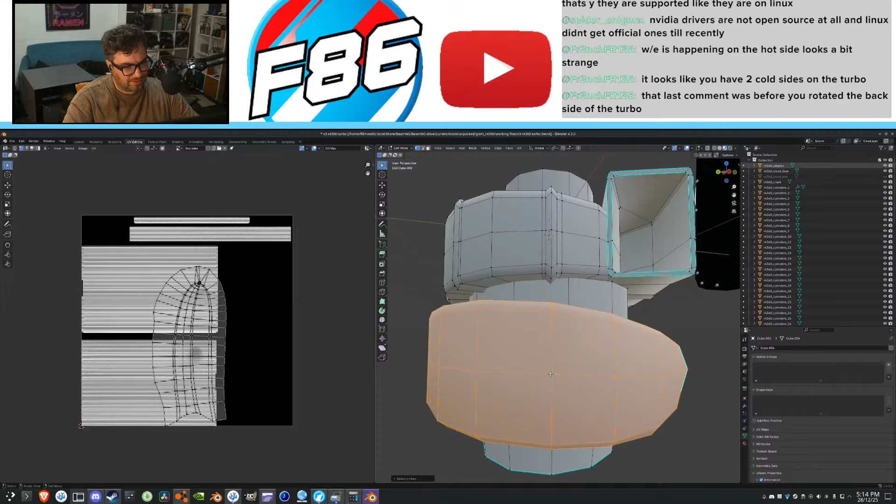I have an idea. Of editing first to start with. Oh, this turbo's freaking enormous. I seem to have made a bit of a whoopsie. UV, unwrap, angle based. I hate the fact that they put this in a sub menu. It's so annoying. Now, should we divide you up? We probably should, shouldn't we? Edge, mark, seam. Edge. No. Go on this side. Edge, mark, seam.

NVIDIA drivers are not open source at all, and Linux didn't get official ones till recently. Yeah, no, I fully agree that NVIDIA has their problems, especially for Linux people. At the moment, I've not had any issues, so I don't want to be that guy. So I won't. I just won't say anything.

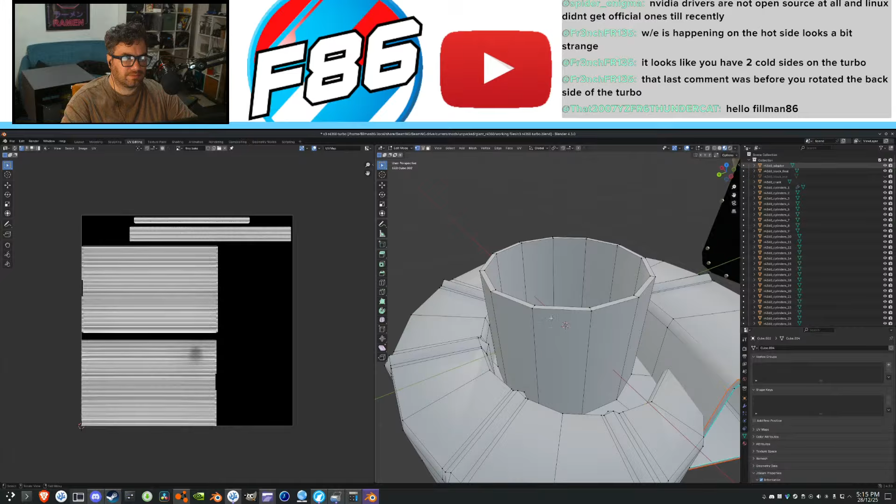Alt H. Then you're good, you're good, you're good. Alright. We'll go with... Oh, yeah. Well, that's easy. Edge, mark, seam. Edge, mark, seam. Alright, let's try that unwrap again.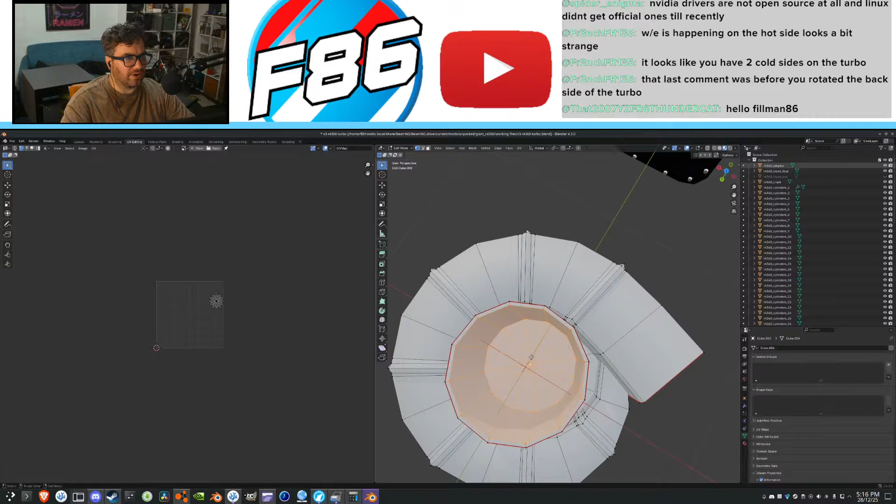Okay, so those are important. Those are important. Oh, what? Okay, there we go. You're important. Stop. There we go. You're important. Did I grab the inside of this by accident at all? I did not. Good. Okay. You're not very important. Alright.

These things do not matter. These things do matter. We're also going to have to separate vertically. So... I thought so. Let's start dividing it up. Good. Here on the bottom. Yeah. Here on the bottom on that side, okay.

That last comment was before you rotated the backside. Oh, okay. Yeah, there's some weird stuff happening with my stream chat.

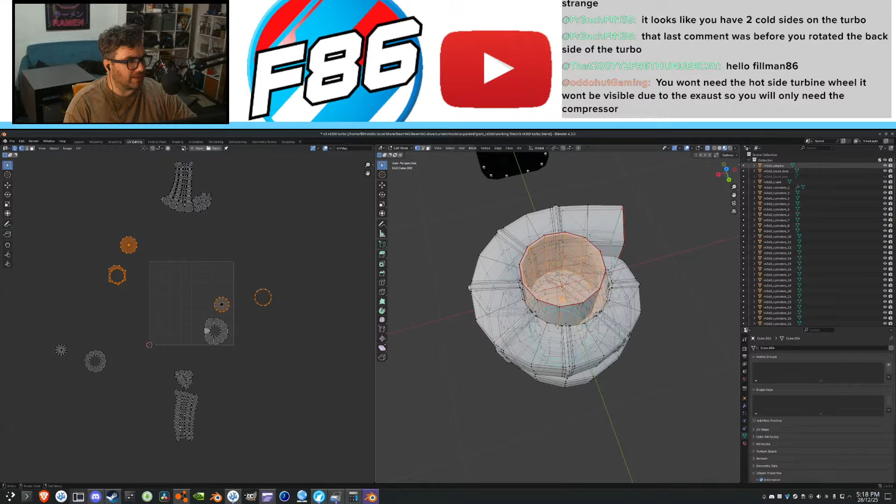You won't need the hot side turbine wheel. It won't be visible due to the exhaust, so you'll only need the compressor. No, it is going to be visible. I'm pretty sure he's going for realism, so he would need the hot side. No, it is going to be there. It's going to be completely visible. I don't know why you thought it wasn't going to be visible at all. Like, there's a heat shielding here, but then the exhaust turbine is right there.

Well, that's the wrong thing. That's the wrong page. Nope. Nope. Nope. Yes. So, there. Turbine housing. And it's going to be visible. Unfortunately, there's just not much way in the aspect of, what do you call it? Obscuring the vision of the exhaust housing area. Back to editing. Okay.

You don't matter. You go on this side anyway, though. Good, you don't matter. You don't matter. Oh, why are they not together? UV, unwrap, angle based. What is this?

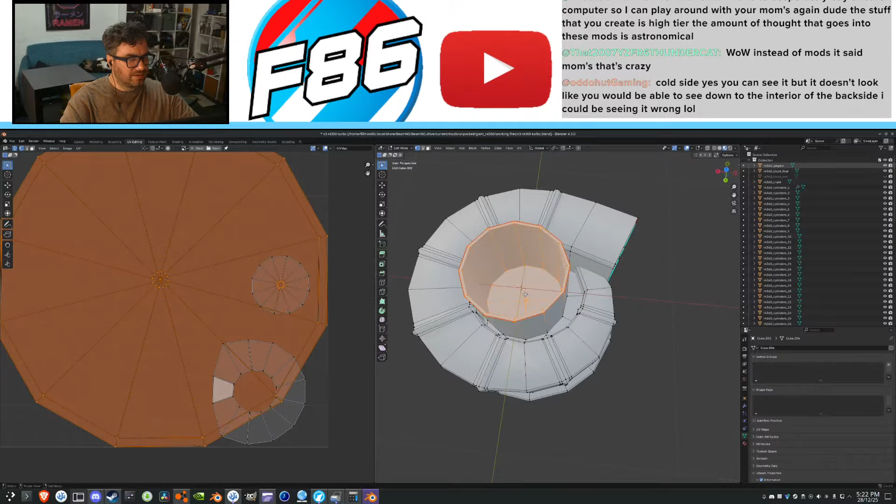Alright, you don't matter. You do matter. What is halfway? Tool. No. Image? No. View. There we go. There we go. What are you? You're that? Okay. I don't wanna, but I'm gonna create a seam here.

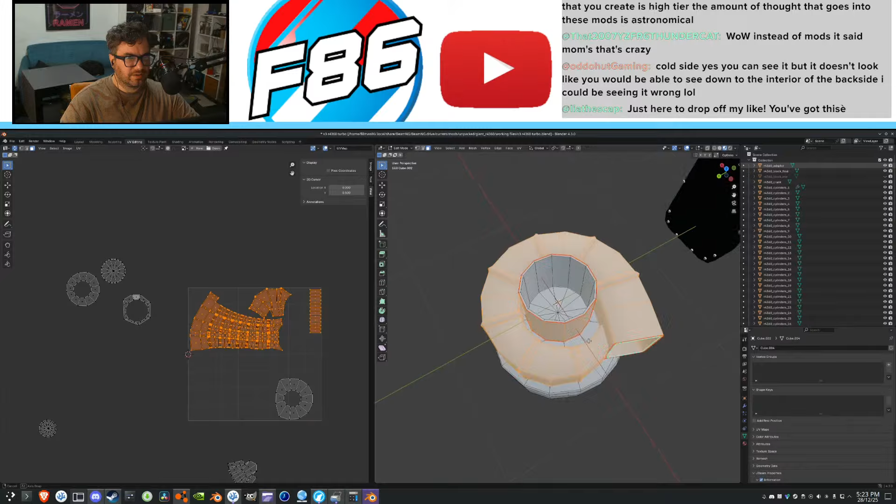Okay, what else? You matter a little bit. You'll be fine. Then you're good. All right, you maybe do matter a little bit. So let's do this. Okay. Grab you. Put you around here somewhere. There, that looks fine. Okay. What are you? You're that? Yeah. Oh, okay. You don't matter. Okay. Then we just pack in these things. These don't matter, as I've said a bunch of times.

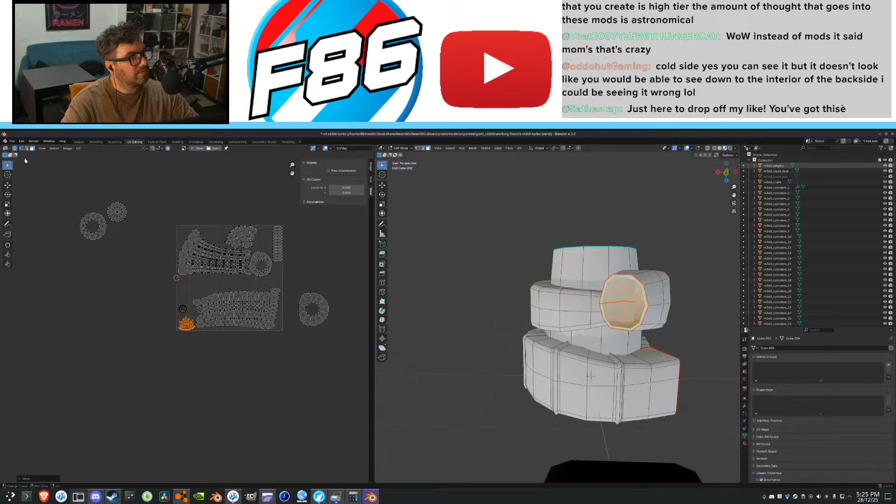That is a really terrible unwrap, isn't it? There we go. You are... Okay, you do matter. Okay. Oh, my bad. Probably not as much as the whole housing, but we'll go something like this. Go. Then you guys. Wait. Oh, that's the intake side. Brain's getting turned upside down. And you. You matter a little bit. Okay.

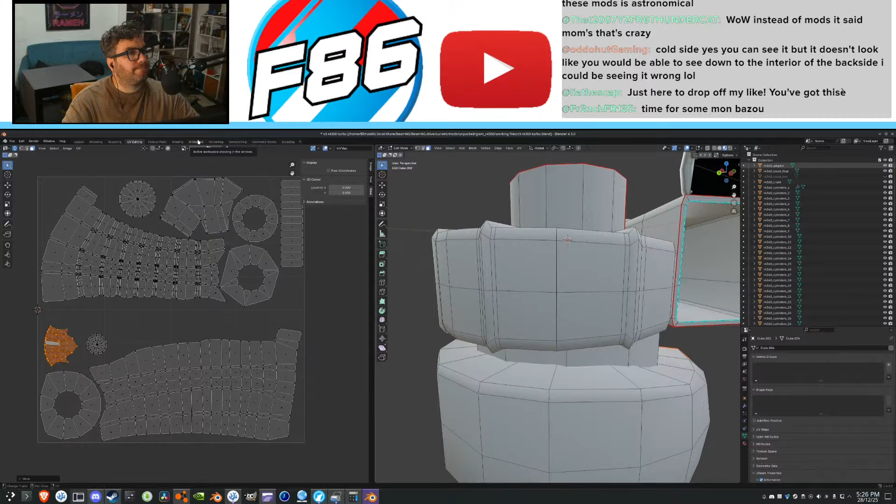Shading. Then... Can I? Oh, no, hold on. For 360 turbo. Put you up there. Mix. Mix shader. Then I want... What do I want? What is the thing that I want? I want... Wave material. Wave texture. Into factor.

Then we'll change you up to be Z. Scale. Oh wait, no. No, I'm doing this wrong. This needs to be on the UV map. Why am I not seeing anything? What's happening? Wait, no, that's not what I want either. Separate. Then I want the Y value.

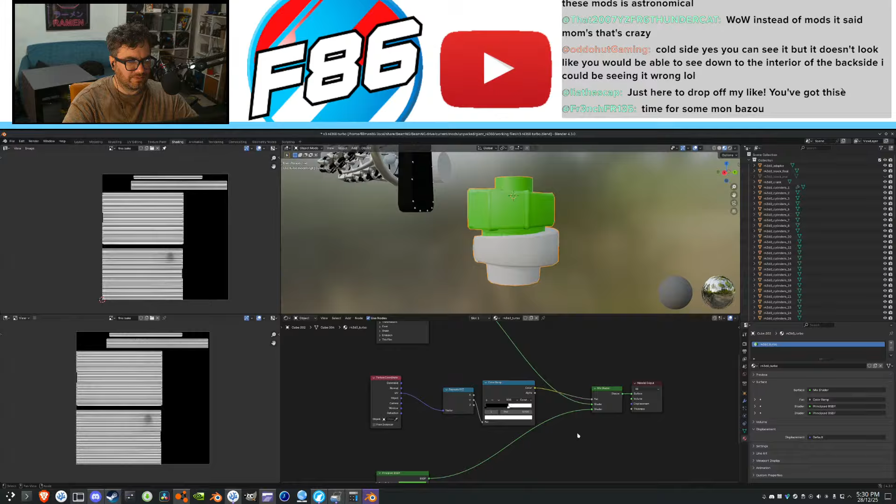Except it's inverted. Aha, I know what to do. There. Damn it. That didn't fix it. Okay. Do you kind of get the idea of what we're going for now? Should make sense. The top one will be very metallic. Quite rough. We'll stick some noise on that at some point. And you don't need to be so vibrant. Oh. Oh, I can. Yep, that'll do. No metallicness. Drop the roughness a little bit. And we will stick a normal map on both of these.

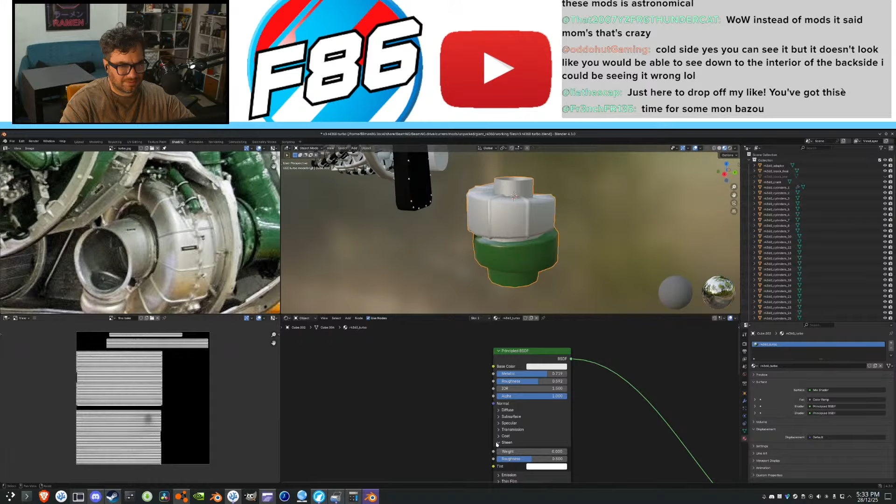Okay. For roughness on a good result as well as set the... Sheen. That looks terrible. What if we turn roughness down and turn the sheen's roughness up? That looks also terrible. I don't know how that works. Sheen coat. So that'd be like a clear coat map. I don't think we're going to bother with that. Transmission specular. Anisotropic? That changed nothing. Anisotropy rotation, nothing. Subsurface. I doubt that. Diffuse. Oh.

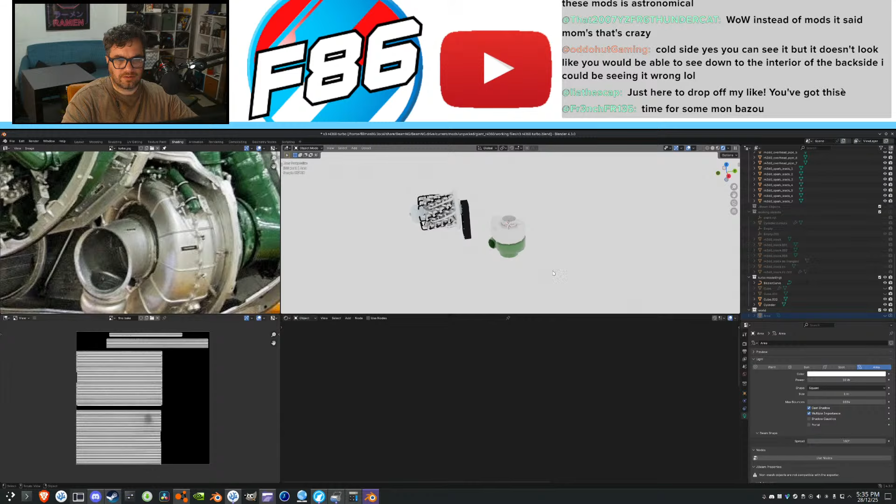Do we have ground in here? We do not. Okay, let's go. Let's go. New collection. World. Drop the area in. Also, add a plane.